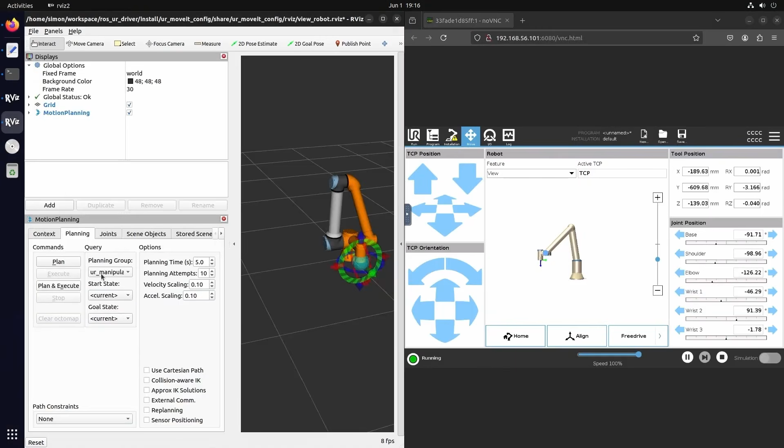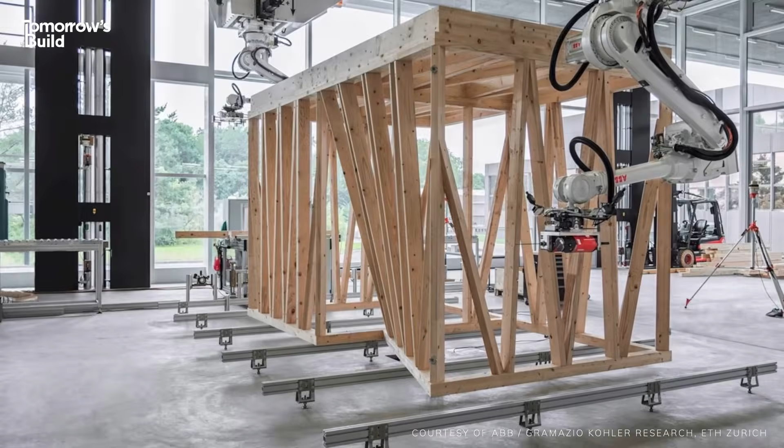ROS. Let's actually talk about why ROS exists, because the name is kind of misleading people and its functionality is a little bit obscure. ROS is called the Robot Operating System, but ROS is not an operating system. ROS runs on top of Linux. ROS is more like a set of drivers and infrastructure that allows you to reuse code in different robots. And once this idea clicks, everything else about ROS makes sense.

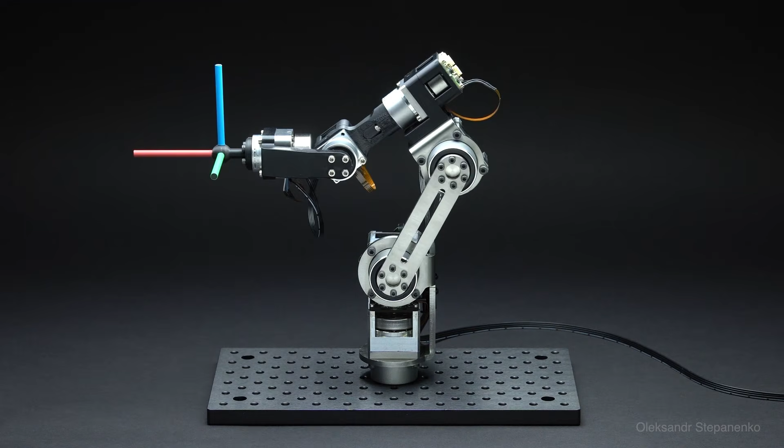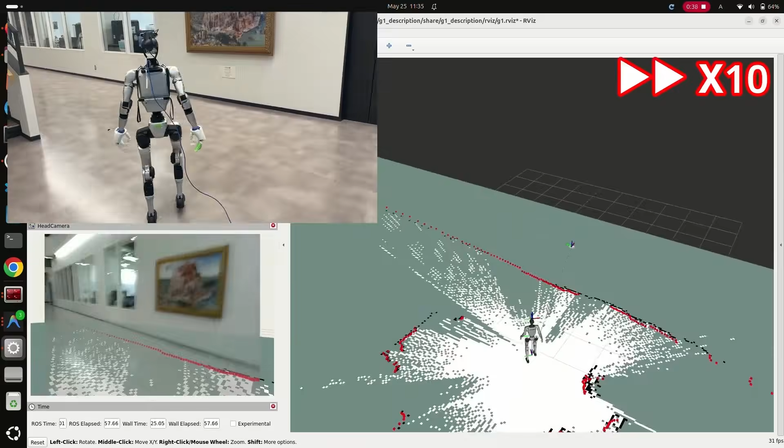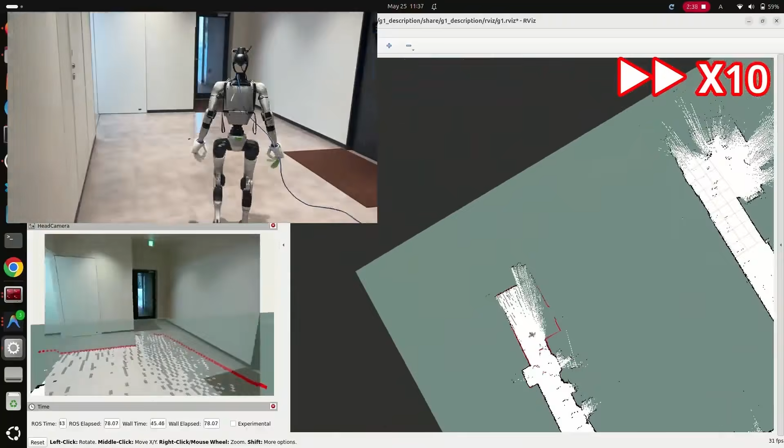Here's the situation before ROS existed. Roboticists were spending most of their time rewriting code from scratch for every single robot, instead of actually doing innovation in robotics. Every sensor, every motor, every robot had its own way of talking to whoever was programming it. You'd write a navigation algorithm for one robot, and then you would need to start completely over for the next robot. ROS fixes that problem by providing a layer that separates hardware from software by using ROS drivers.

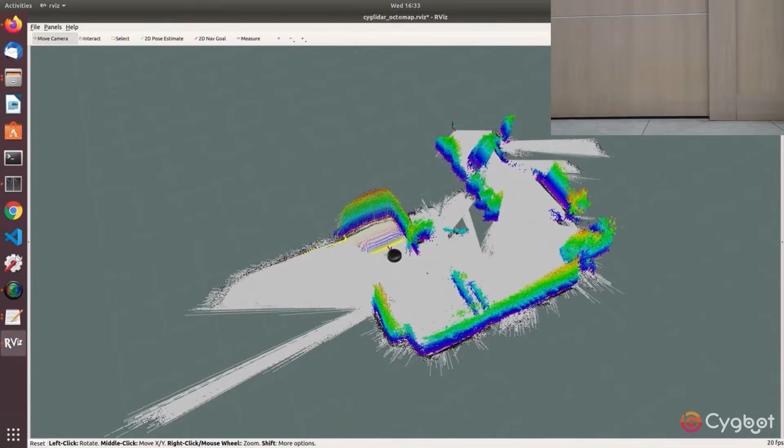Now, a few things that show that ROS is genuinely great. First is the hardware abstraction. ROS standardizes how you talk to sensors like LiDAR and cameras, and to actuators like motors and grippers, so you write your high-level logic without worrying about the low-level driver's details. You don't care whether the robot has this LiDAR model or this other LiDAR model. You just subscribe to the topic, and then you get the data from the LiDAR.

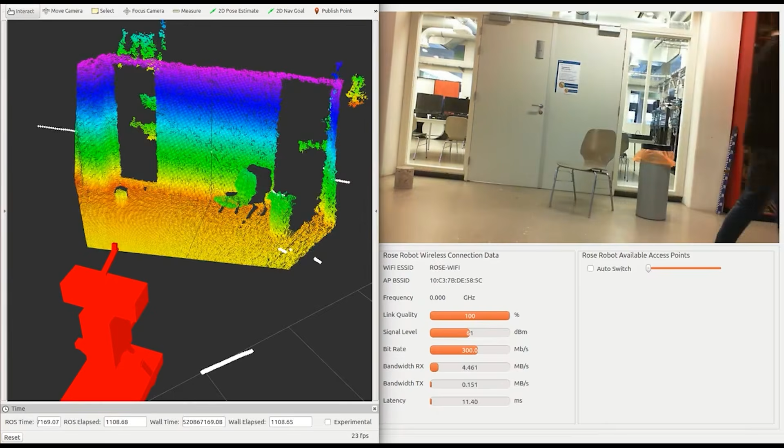Second, you stop reinventing the wheel. For most common robotics problems, there is already an open-source ROS package available. The navigation stack, the motion planning with MoveIt, or visualization with RViz. Those tools already exist, written and maintained by the community. You are not writing a path planner from scratch in 2026. Writing one from scratch would be a waste of time. You just use the ones that ROS provides.

Third, the programming language doesn't lock you in. You can have a node written in Python talking to a node written in C++ in a completely seamless way. So you can use Python when you want speed of development and C++ when you need raw performance. Both in the same robot, in the same system.

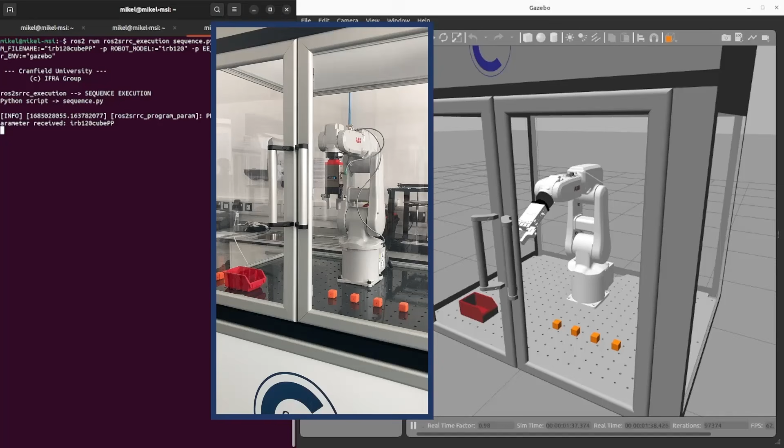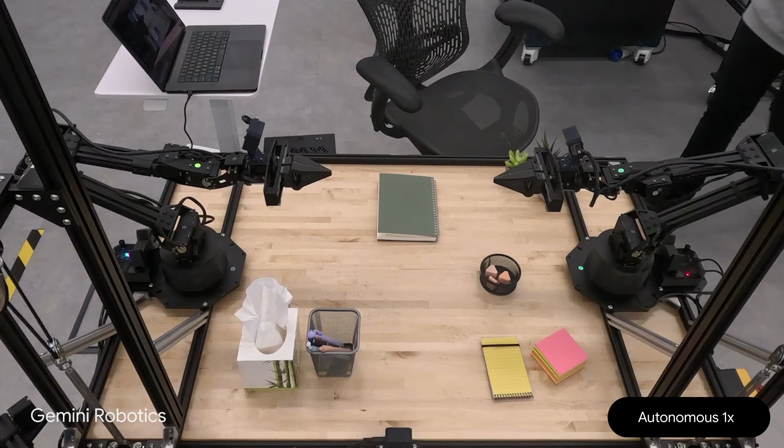And fourth, the one that I think is most underrated. Simulations are built in. ROS lets you simulate your robot in any environment before deploying anything in the real world. And tools like Gazebo even let you simulate robots that you don't physically own. That capacity is the whole reason you can learn robotics without a robot sitting on your desk if you are using ROS.

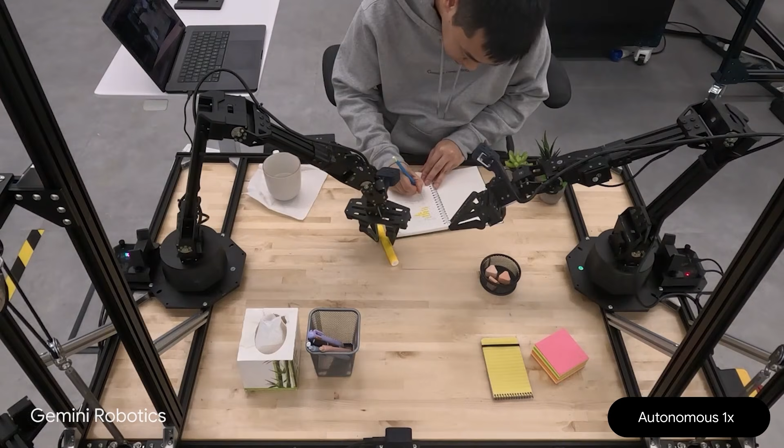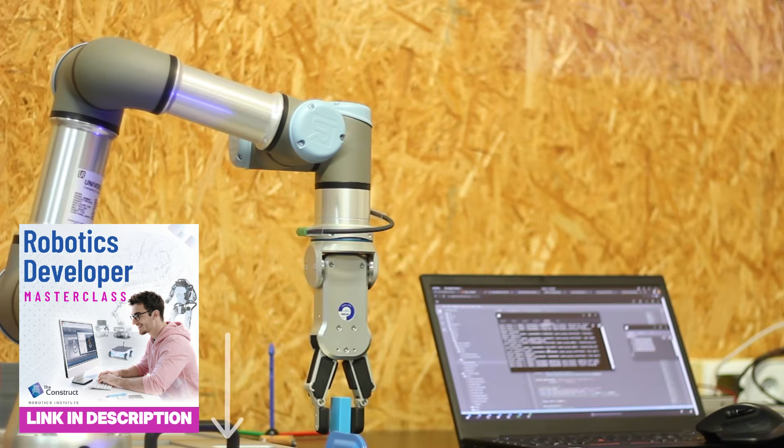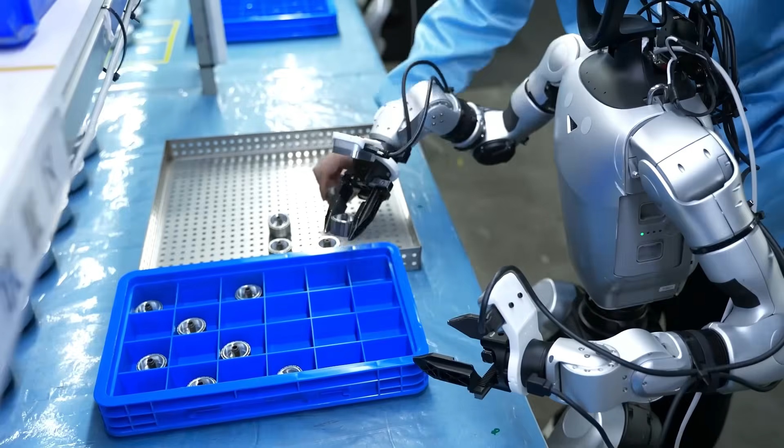Well, ROS isn't some university toy that stayed in the lab. A professor at Carnegie Mellon put the point very well. ROS has become the lingua franca of the robotics world for connecting sensors, actuators, and processing elements. Without ROS, getting even the basic robotics project off the ground takes a tremendous amount of effort and time.

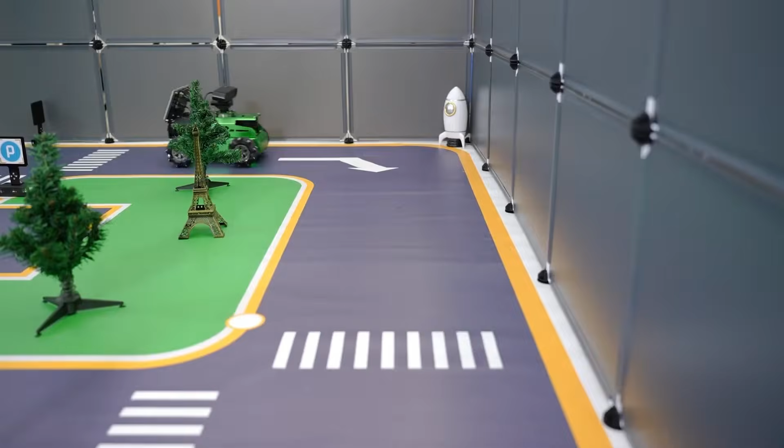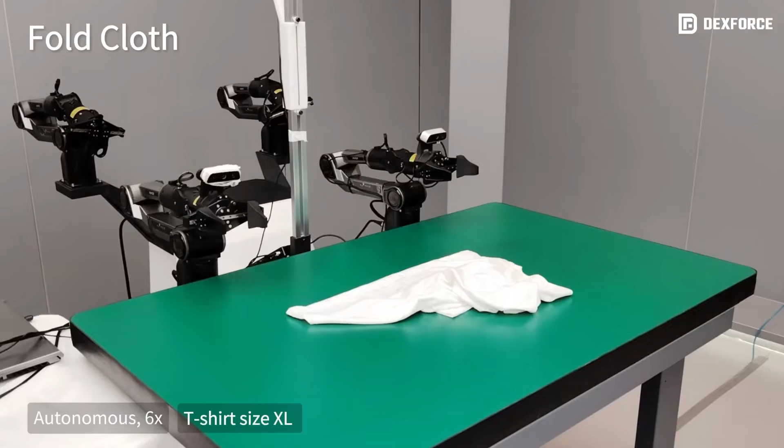ROS shows up in self-driving car development, integrating LiDAR, cameras, and GPS for perception and decision-making. Companies are using ROS for industrial arms, doing pick-and-place and welding. ROS also runs in humanoid robots for navigation and grasping. Different hardware, different industries, same underlying framework. Because once you learn how nodes and topics of ROS work, that knowledge just carries over.

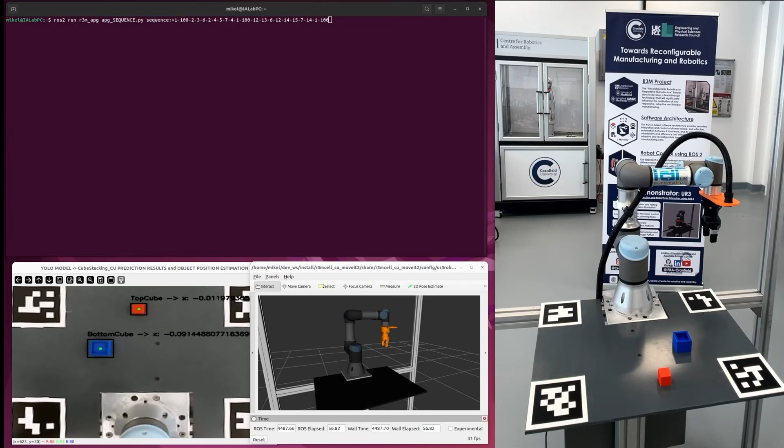Here's the part that actually matters for you practically. You can install ROS, fire up a simulated robot in Gazebo, and start publishing and subscribing to real topics of sensor data, motor commands, and all that. All this without even touching a physical robot.

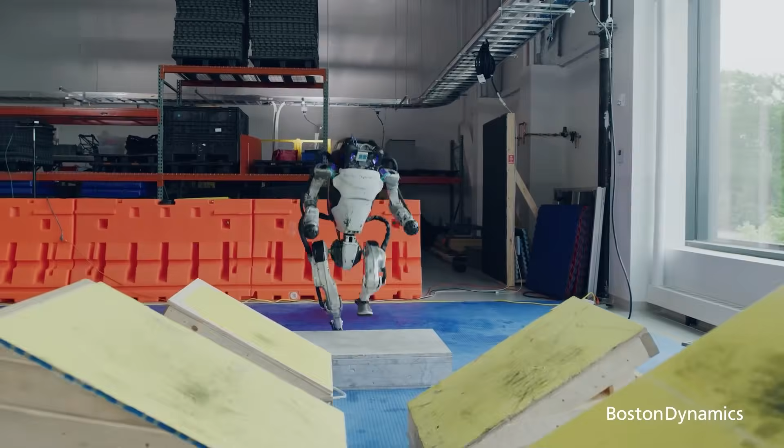ROS gives you the tools to visualize and record the data, navigate the package structure, and script the whole setup yourself. And the moment you understand nodes, topics, and that publish-subscribe pattern on one robot, you basically understand the same pattern for every robot. That understanding is the actual payoff. You are not learning a single tool, you're learning the architecture that the entire field agreed on.

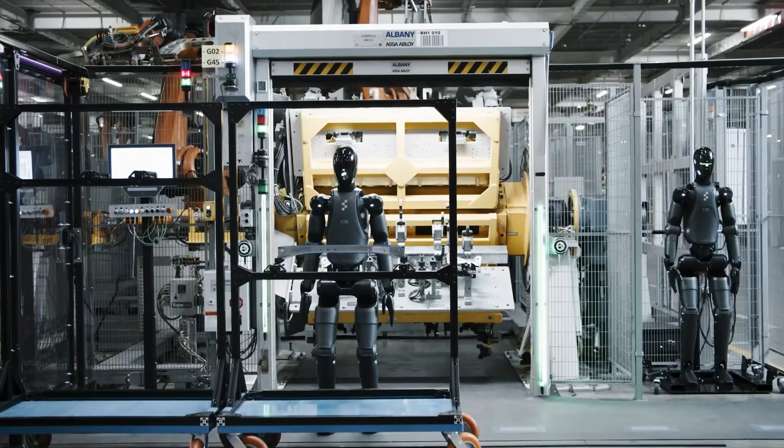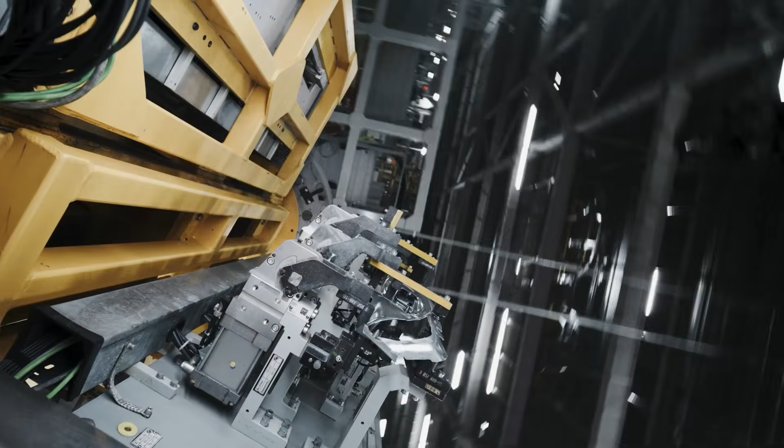So that's ROS. Not an operating system, not magic, just a really well thought out way of letting independent pieces of a robot talk to each other, with simulation and a massive open source community sitting right behind the framework.